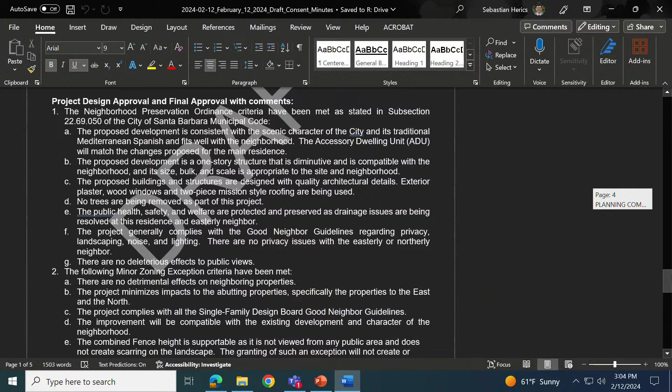Oh, the last one. Okay. Got it. Are there any items you guys didn't see? I might have skipped through the first few a little too fast.

Sure, A and B. A and B, okay. Yeah, I think those were both the final approval. If you just go to the notes - oh, that one was continued.

And so for item A, this case had a PRE case, and Board Member Kloss saw fit to continue the comments from the PRE case as the conceptual minutes for forwarding this on for further review. So you'll see these are the same exact comments that were received during the PRE hearing, with only the added note that the board reinforces that color and landscape screening will be important to see at design approval stage. Just making that a little bit more clear.

Okay, I move to approve the consent calendar minutes from February 12th, 2024. I'll second that. Do a roll call. Okay, we will take roll call.

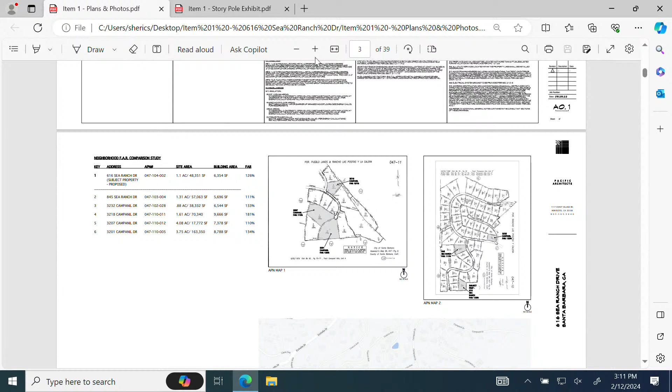Also, as we go through, we've done a floor area ratio calculation of the neighborhood. I don't know if you've had any chance to see any of this, but there are certainly projects and homes in that neighborhood which are well above the 100% FAR. You can see 181, 134, 133, and we're at 126. Again, I'm including everything as well as the ADU, and I know you won't be looking at that.

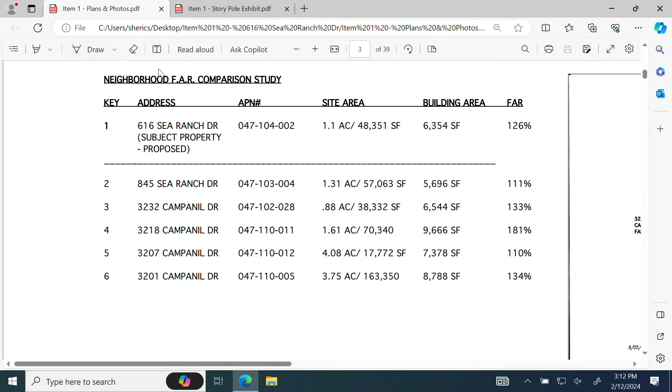Okay, to go on, what we're doing is we're coming in - right now it's kind of a flag lot. Comes off of Sea Ranch, which is here, and a long driveway, and we've worked with the fire department on developing that. Existing long driveway comes back to the home that sits in here, currently exists right there today. I've got a drawing and a document that shows where that is better than what this is showing. It's in red.

Generally, the footprint of the existing house sits right about where that one is, oriented in just about the same direction. Their garage sits over here, ours sits over here, and our ADU sits in this area. Again, it's a sloping lot, very high on this side, sloping down to a flat pad.

So this is kind of the neighborhood. You can see homes scattered around us. These houses are way, way up there, much higher than ours. These two are splitting down the middle with an easement that shares access to this property, but not to this one. They have their own access here.

We are an easement across both of those properties to get back to ours. I know we have some neighbors here today as well. This neighbor here was mentioning to me that his footprint's actually different than what's shown, I think it's a bit larger than what we're showing.

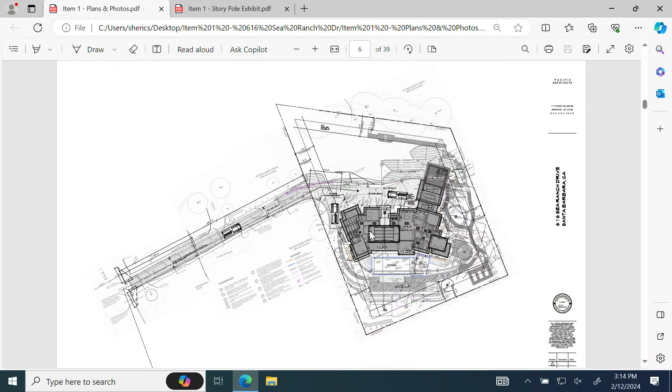Again, single story home, we kept it low. Currently the height of this is about 2.5 feet shorter than the building that's there now. So the existing house has a pitched roof, and we're doing flat roofs, and again it's about 2.5 feet shorter than what was there before.

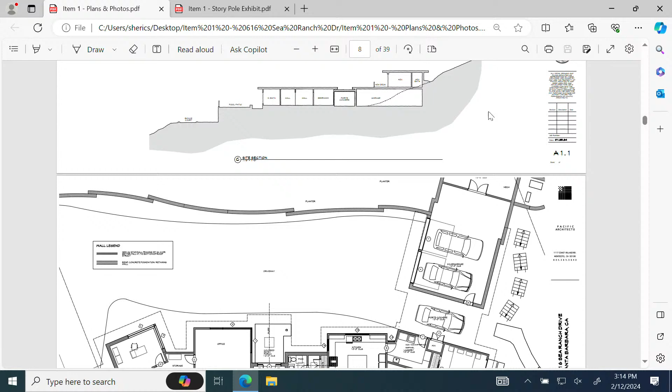Again, single story, single family home. Enter in through here. We've got a basement space under here that's really only for mechanical, that sits under this bedroom, on the high side of the property. Then the only two-story element is this ADU piece that's stacked over the top. You can kind of see it in the section here. We're nestling it into the hillside, burying a good part of that garage storage underneath.

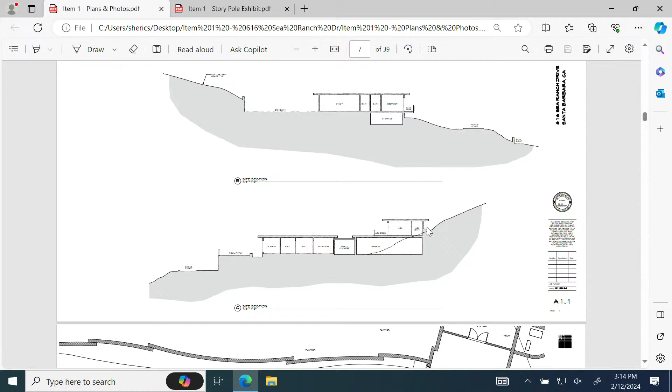Here's the little storage area underneath. So technically, I don't know if I'd say it's a two-story home, but we do have some pieces stacked over each other, those elements that are buried. Here's the garage element, again tucked into the hill. This is completely subterranean, it's 7 or 8 feet, might even be 9 feet of retaining there.

And then here's the underfloor area. Again, this is all just underfloor, raised foundation, and then excavated area here for mechanical. The rest of it's open.

I'll let Stacy get into our pool and site layout, but we've got an infinity edge pool there too. Again, ADU -- I guess you guys don't look at that, right?

Just for some clarification to the applicant and the board, the ADU is currently under the SFDB purview because it's proposing the glass railing, specifically the ADU deck. So once you get your zoning plan check corrections, you'll see that.

Okay, all right, well, there's the ADU, and again we're retaining against this side of the hill, so we're actually tucked into the hill there about 6 feet. And here's our lone glass rail right there. So if you have any issue with that, let us know.

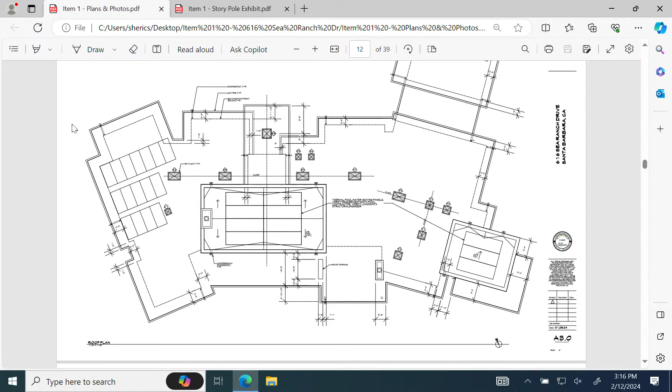Solar panels -- we've got water for heating the pool, and we've got photovoltaic on the roof for everything else. Again, single story, we're going to have a combination of plaster and stone, we're working on picking that material, very earth tones. The windows and doors will probably be aluminum, either Fleetwood or Western or a version like that, might be a fairly narrow profile.

Here's the infinity edge pool. So this view actually includes the site that you're seeing. Really there's the second story piece that you can see there, and the garage, or the ADU, sits over the garage on this side. Here's a pretty good shot of how that all lays out.

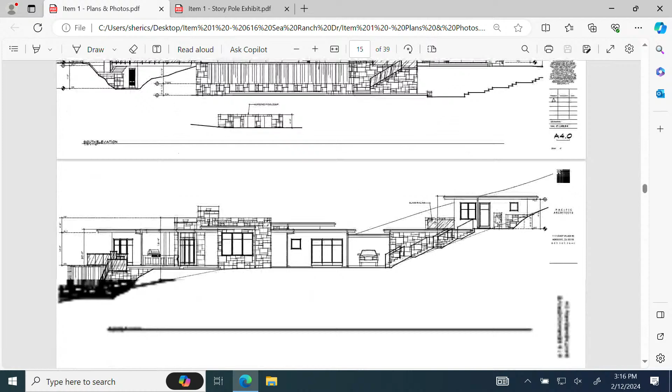There's the ADU, glass railing, garage. This is an open carport, which is actually added into the square footage too, it's open, kind of a breezeway connection. Stone, again, kind of a constructivist sort of pieces of stone and plaster. Oh, we do have some glass rail over here too, I apologize, on this side. There's the infinity edge pool.

Here is a cross section through the breezeway showing the upper floor of the ADU.

And that's our civil. Our grades, in terms of setting the finished floor, we're actually about half a foot lower than the existing house, so we're pretty much in a similar location. We're working on our stormwater drainage and our septic, we're on septic there too.

So I don't know if you've had a chance to see any of the photos, I'm happy to walk through these real quick. I won't get into too much of the weeds here, but there's a long driveway that leads out. I'm going to go to some story pole plan that I have here.

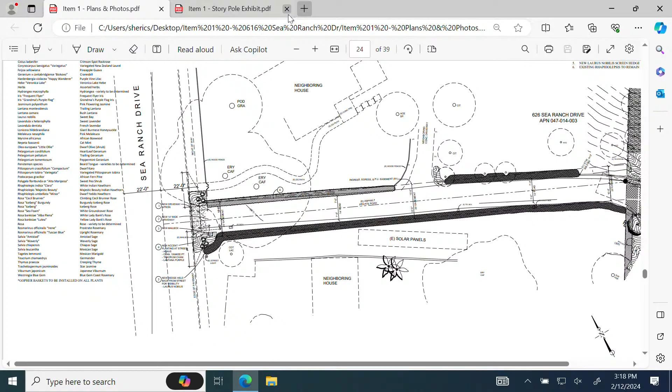We actually story-polled this structure so that everybody could see it. The HOA wanted us to do that, so we did it, and they've given us their green light. The edges of that are the roof line, not the walls.

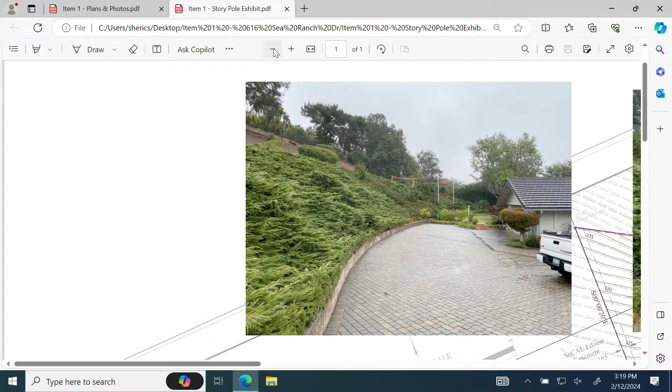This is actually story polled about 2 feet higher than what we're going to build it at, because I didn't have the civil drawings, and they came back and said it doesn't need to be that tall. So I said, okay, great, we'll knock it down. So that story pole represents a taller element.

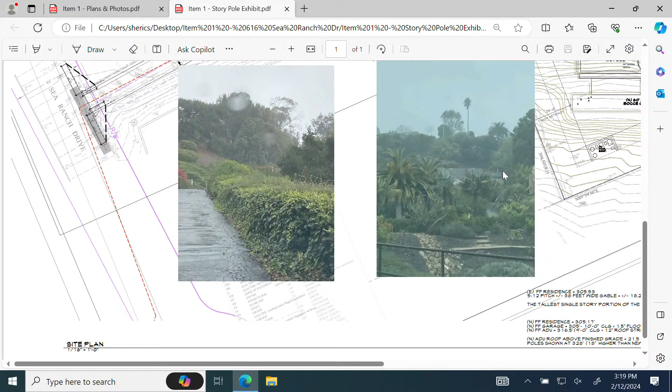I took some shots also from down the street. This is across from the neighbors here, the other neighbor here. Dan Claus's home is here, Suzanne's is over here, we're up in the middle. You can see just a little bit of the top of that second story roof line. Again, this building is about 1.5 feet taller than what we're going to be.

So you can see, and Stacy will get into the landscaping. This is a shot from about the middle of that long driveway, looking back at the roof. Again, that's the only thing you could see. You're not going to see any of this, well, landscaping. We'll see the front face of the building, of course.

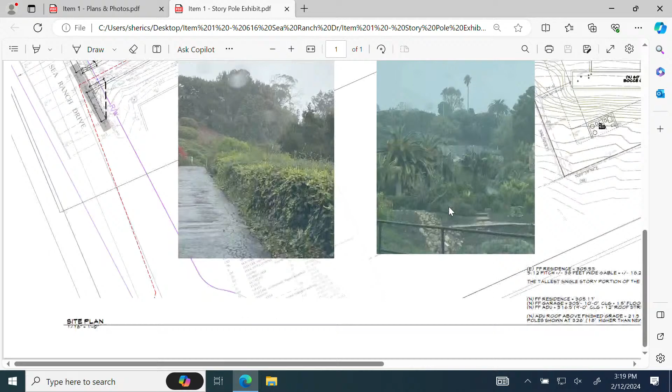This drawing also shows kind of the layout. That red shadow in there, that's the existing building. You can kind of see how we're, this portion too, just to give you a - this is all just covered lanai too, this isn't actually building. So you can see the areas that we're increasing square footage is here and a little bit here, and then of course the garage over there. So it's really not as much as it might appear.

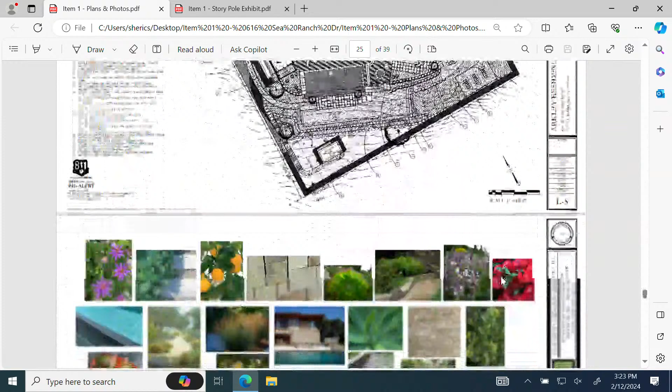There is a pathway we tucked into the hillside up here. There's a really pretty view, but currently there's just a footpath without any steps. This is kind of an example of some imagery of what we're thinking for materials, plant material, keeping with the warm tones of Santa Barbara sandstone, these types of cast-in-place concrete steps for the hillsides, using pebbles, drought-tolerant plant material, gravels, stepping stones, and dry stack stone retaining walls as garden walls to minimize any engineered walls.

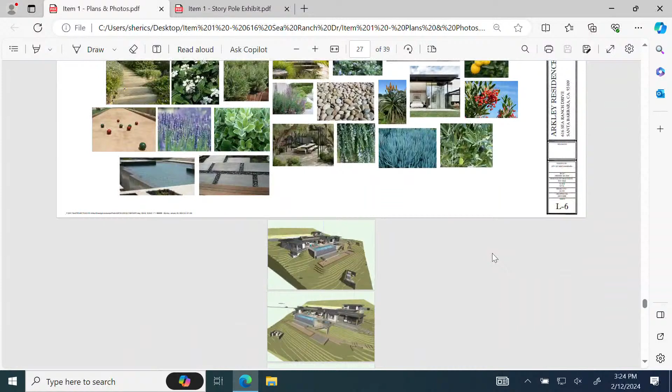Just to give you kind of the 3D, real rough and loose. Where are we here? There we go, okay. Anyway, just to give you the idea of the massing of that and the slope - it doesn't have any trees on it. No trees, this is denuded of any planting, of course, and it will not be like that. Again, kind of earth tones, that kind of thing, tucked into the hill up here.

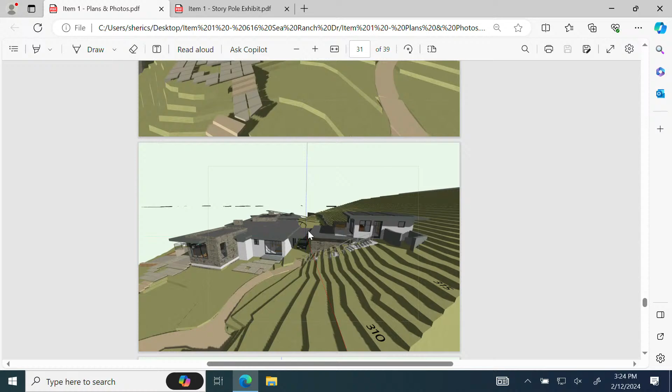Infinity edge pool, with the side sloped again. It's a two-story home. A lot of large trees at the back, that back slope too. This is all very well screened. That whole side as well on the other end is also screened.

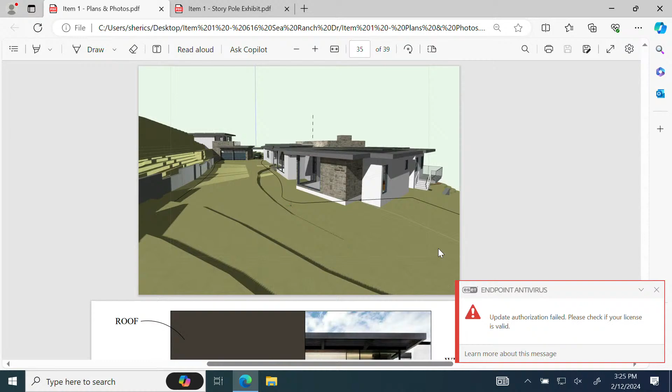This is the front. You can see 6 feet of retaining on that upper floor of the ADU. There it is, tucked into the hill too. Again, all planted along that western edge as well.

And there's just kind of your sample material colors and finishes kind of happening. It's a work in progress materials, exterior materials board.

And there's the existing house. Again, we're about 2.5 feet below that. I think I scaled it at about 17 and 3/4, almost 18 feet, and we're at 15.3. So we're quite a bit less.

These are the existing trees that are happening on the site. And the pine too, that stays as well, right? Yeah. And here is, move it over. That's kind of the aerial there.

Where are we? There we go. Gray house, yeah, there it is. So you can see pretty thick vegetation here. And we're not protruding anything beyond that line, so the idea is to keep that lush and thick and keep the privacy between the neighbor here. These folks are much higher, they don't see over. And this is also quite lush and thick. And I believe those folks have been talked to, and then the neighbor down here as well.

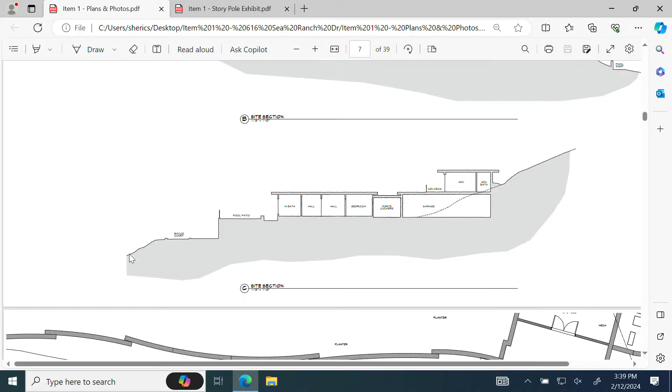But it does continue downward. Is the roof deck only at the ADU in the back portion? Yeah, that's the only roof deck, no other roof deck.

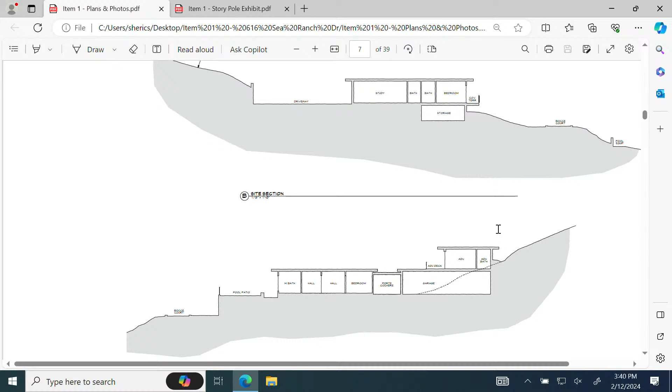Is the second story of the residence only defined as such because of the storage area on that lower southwest corner? Yes, it's this storage area here, that's the only second story, including this ADU over the garage, tucked into the hills. The reason you have to technically call it a second story is because the level of exposed basement doesn't technically qualify, and I think we're 3 sides covered, although do we need to be 4 to be considered a full basement?

That's something we can explore. I just wondered if that was the only area the speaker was talking about regarding the second story.

And then, was it 122 or 126% FAR? Because you have conflicting documents, one said 126 and one said 122. Oh, does it? Well, we'll go with the higher one, but I can clarify that. And without the ADU, what would the FAR be?

Without the ADU, oh, I can't do math that quick. I'll give you a little bit of time to come back, because I think I'm probably not the only one that's going to have that question. What's your ADU square footage? Yeah, the ADU square footage is, well, let's go to the front page, here we go.

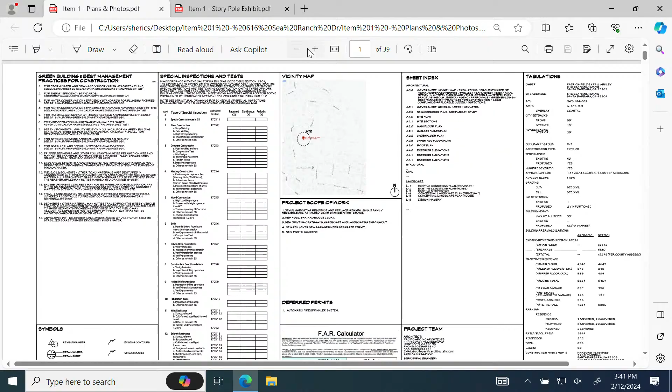But I also wanted to know if it also included the carport. Yes, it does include that carport. The total 6350 includes the breezeway, which is a carport, and the garage, and the storage, all of it. It's all of that, which is maybe not really the right way to look at it.

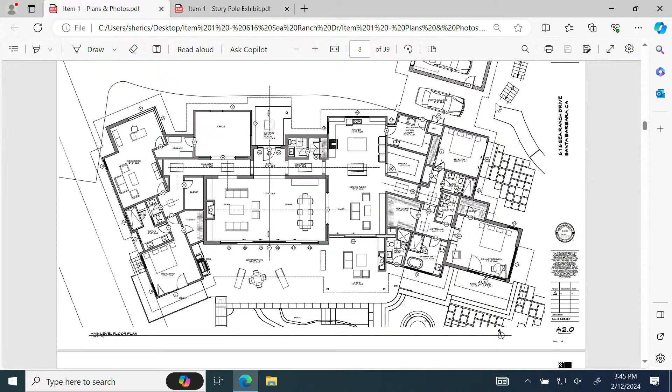Okay, so it'll be two plans. This is the storage that we need underneath, and then the other is up in the ADU on that deck right here, this bit right here. We're open to suggestions, if the glass isn't appropriate, we can change.

No, I just wanted, I was more curious on the south side. Thank you.

Any questions? Yes, I'm feeling the rush to keep it at the same pace. But back on the FAR, because that's one of our biggest challenges, is to find neighborhood compatibility. And honestly, the 126 is probably the highest that I've seen.

So I think that in further submittals we need more clarification on those square footages. Typically, we look at the 10 closest homes or the 20 closest homes for neighborhood compatibility. So I would like to see surrounding your property versus in the area. To me, that creates the neighborhood compatibility, because what you're saying is actually, it's not double the square footage.

So getting clarity on what the square footage is, I think Dawn covered it, so I'm getting closer to being more comfortable with that. But I'm still questioning. As an applicant, when you ask for more, you need to provide justification for it to be easier to say, yes, it's compatible. So I guess I don't have any questions on that further than Dawn's.

Do you want me to do that now? Sure. Oh, okay, all right, sorry. So, a lot of this will be certainly handled in terms of privacy, is the existing screening, is landscaping. So I'll let Stacy talk to that quite a bit, but I'm happy to walk you through the elevations as well. Yes, thanks, I can get to them, wherever they are here.

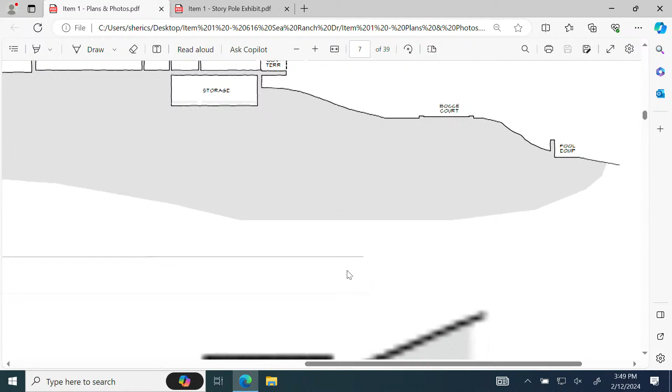And most of the south facing, we have eyebrows to help cut down on the sun angles too. So that's some of the options that we've done there. We do have tall 8 and 10 foot windows and doors, which is fairly typical of this type of architecture. This is the east side. Again, I don't think anybody seems to have any concern with that.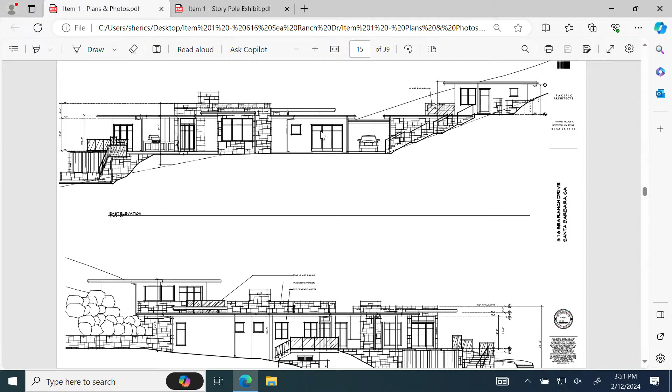Well, that's the one on 606, correct? Hand to the left, that's the west side. Oh, that's the west, yeah, okay, so that, I think, west and south seem to be the most concerning of everybody. This is the east side. There's a porte cochere, glass, again, overhangs on all conditions. This is the west side. Here, we have fewer windows on this side, and we've kind of positioned them lower or further away.

These are high windows, so you're not really going to see much with landscaping. The existing hedge is probably up to the top of that window line. There's an existing oak tree where you have that 22-foot elevation, right along the property line. And then there's a xylosma hedge, 16 to 20 feet tall, that runs along that property line and ends right in here. We're happy to add that to the next elevation if you want to see exactly what we're getting at.

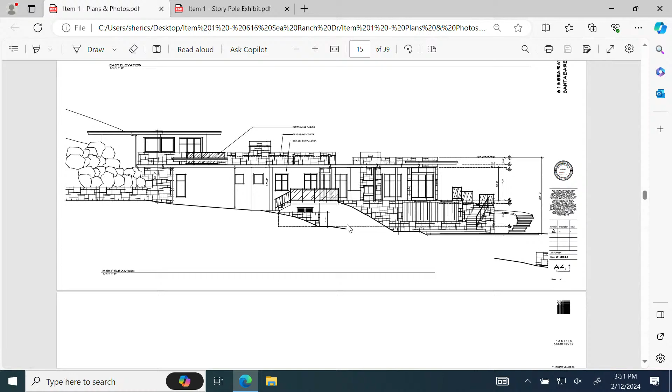This is facing south again, but you're having to look over the roof of the single-story house in front to get that view. Again, long overhangs wherever we can get them to help reduce the glare. We'll certainly be considerate of lighting for the site on the buildings, to be night sky compliant.

Did I address all of it? Yeah, I think most of the concern, because the south is set back and the west is so far away, was the east neighbor and the conversation around her pool and her yard on that side of the house.

West neighbor? Is that west? Is North up? North is up, west is there, south, east - east is here, and west is there.

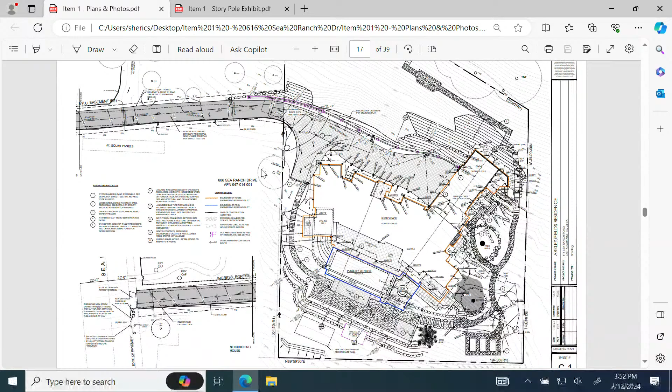You can see the oak tree right there. There's hedges and trees that are, whatever, 8 feet more. You can see the existing oak trees there with the dashed circle, and then that hatched area is an existing hedge that goes all the way down. The solid line is...

That's new screening along that property line. And then you see the tree in the center of that south property line - that's an additional tree added for that corridor that looks down to Dan Claus's property, to kind of block that view. There's also an existing pine. We didn't have time to color this; we had a short turnaround on a few things, so maybe it'll be more colored for next time.

Board Member Anderson? I do, yeah. The true stone and the glass rail - did you consider another product besides the glass? And the true stone, is that a natural stone, or you don't know yet? It's natural, it'll be a natural stone veneer, some sort, yeah.

And the glass - we left our options open. We could do cable rail, could be stainless rod, could be just about anything. They favored the glass, so we thought we'd start with that.

Okay, all right, that's it for my questions. If you could walk us through both of the equipment yards that you have, and what's provided screening-wise. Let's zoom into there. So where the pool equipment is - you've got equipment on the side yard and then one in the back as well. Both pool equipment areas are enclosed on all sides with a masonry wall.

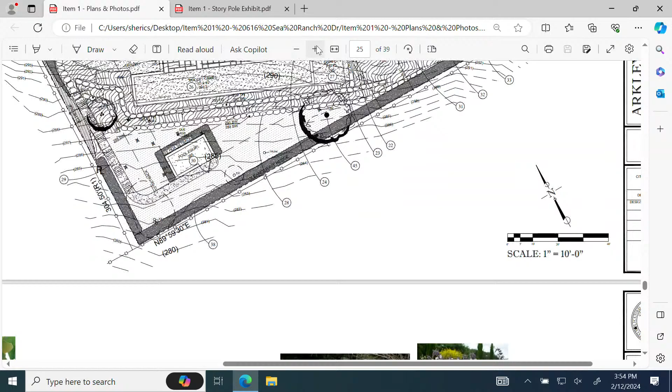It's also sunk into the hillside, so sound mitigation shouldn't be an issue. We're out of the city setback. The HOA setback is slightly different - we're only into that one on the south side.

What was the other equipment area? That's up on the west side. Right there, there's just a little bit that's outside, uncovered. So this is an area where we had talked about doing just the condenser units out here.

Again, we'll be cognizant of their sound levels and make sure they meet all the minimum dB ratings for neighbors' property. The majority of the equipment's going to be underneath the house, though. This also has a masonry wall around it, sunk into the ground. It's sunk into the hillside, so you won't see it, and certainly the deadening of earth and an 8-inch thick, at least, masonry will help do that too.

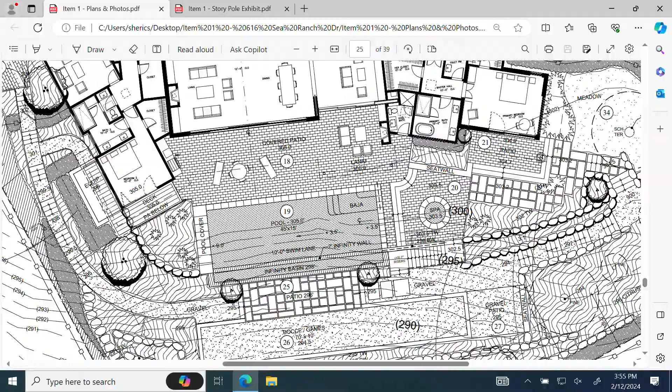Okay, all right, I think we're good to move to comments. We'll start back over here.

I think this project is a really good example of an applicant being very sensitive to the site, with the proposal for essentially a one-story house on a steep slope with manageable plate heights and nice materiality. I think it's also a good example of how easy it is to exceed the FAR when you add an ADU, a covered breezeway, a two-car garage, and a 300-some odd square foot storage room that you can't see from anywhere.

It would be good, just for peace of mind, to have that analysis so we're more comfortable with it. I'm surprised it came out to be 126, honestly.

I think good neighbor policy for privacy should be achieved by landscaping, not necessarily by creating high windows on houses. So I think this is also a really good example of efforts being made to provide screening, which I think the applicant wants just as much as the neighbors do.

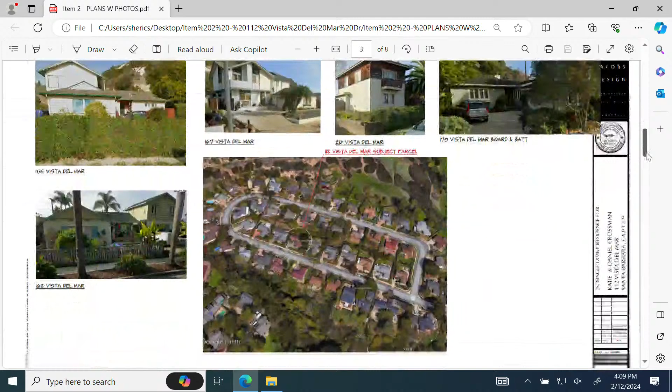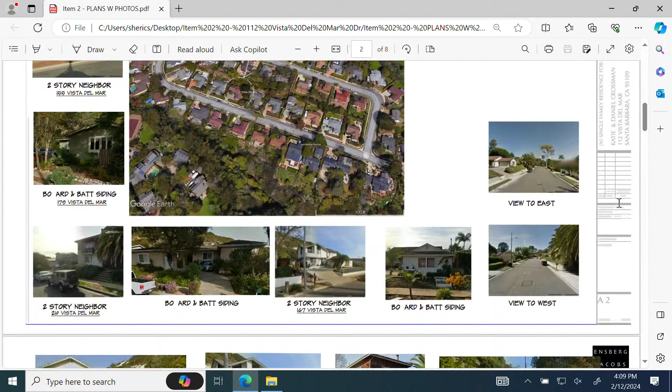This shows a little bit better some of these houses. I'm sure you may be familiar with this neighborhood, having seen other projects come through, but this is the subject property right here. This is coming up to the east, going down the hill, and then this is going up the hill. We took pictures of all the two-story homes that are just kind of sprinkled around.

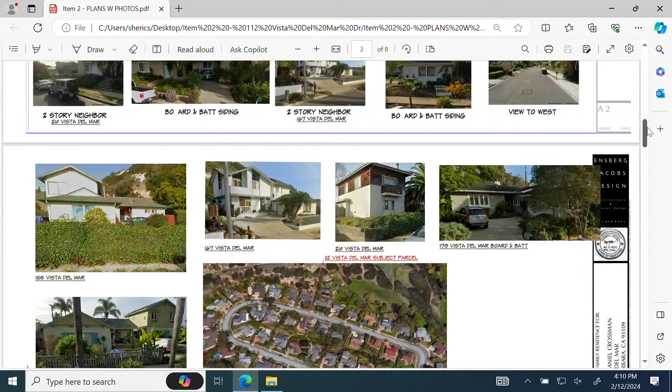Obviously it's in the coastal zone and the coastal high fire zone, but we don't have any issues with being in coastal, so we got a pass on that. But it is high fire, which is kind of a surprise when you get your site information - high fire, coastal high fire. It's our first experience with that, but you can see why there's a chaparral zone, and that makes total sense.

If we start with the existing house, the size is 1625 square feet. It's a 4-bedroom, 2-bath house with a 400 square foot attached garage. The lot, just like every other lot on the cul-de-sac or development, is an L-shaped lot - the development is L-shaped on the lot.

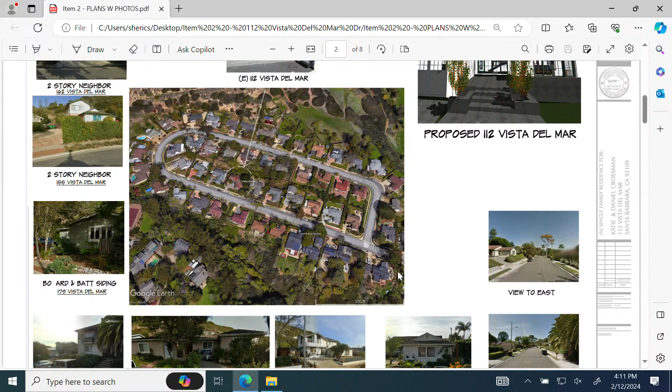There's usually a right turn into the garage, which is downhill. So the developer was sensitive to the topography, but he didn't have anything other than one particular step, which was take a left.

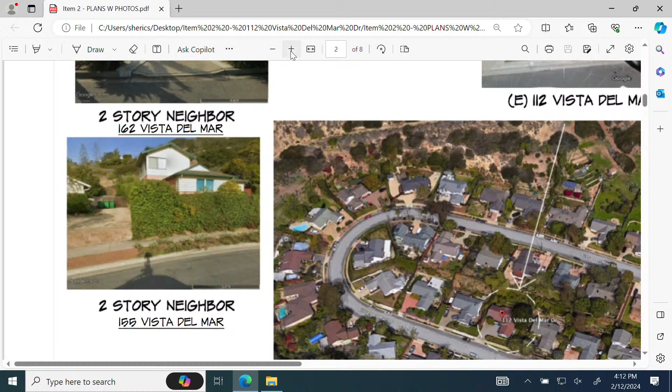I wanted to zoom in a little bit on that. Here you can see how it's typical with the garage, so the cars cross in front of the front entrance to the house. I'm sure you're very familiar with this pattern - one of the reasons it occurs is that if you turn your garage 90 degrees, you get an additional 5 feet, so they were happy to make use of that.

The proposed development, to repeat, is 2,466 square feet. It's 4 bedrooms, 3.5 baths, and a 421-foot attached garage. The lot is 80 by 110, so 8,800 square feet. Our FAR is 85.

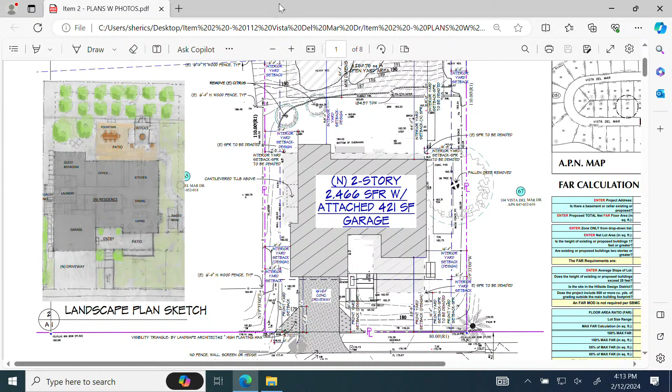We had a lot of iterations to get to 85, but I know in terms of the impact of the development, having it at that number really helps it fit into the overall setting, because these are all modest homes, and it also makes the two-story comfortable rather than having it stick out. The existing house is also on the setback on the west and the south.

That's one of the things we'll see here. I guess we can go to the plan. This shows it moved - it's underneath, lightly dashed there. So it is on the setback on the west and south.

Why don't we keep going to the plan just to walk around. So you can see in this grade version where it is closer, and it feels very tight when you're there. That's why we wanted to move it over a little bit, because we had room on the right-hand side, and we're trying to also get it away from the neighbor here on the west side.

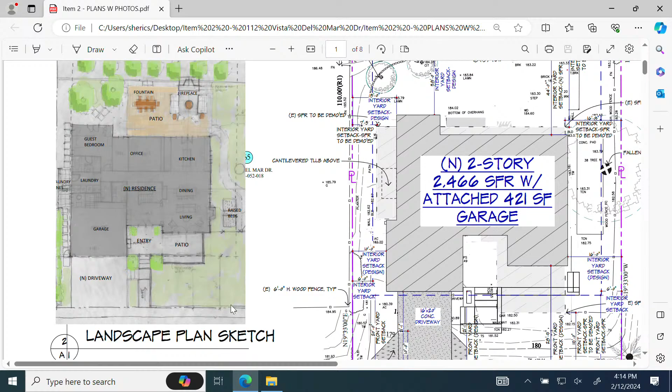To add to that, rather than having one side be simply utilitarian, we wanted the landscaped feeling rather than an alleyway feeling on that side. So we had an overhanging tub that we did not want to have an encroachment. That was another factor in keeping the development a little bit further away from the property line than you might imagine necessary.

Okay, yeah, so quickly, you want to go back to the floor plan? Yes, so quickly on the floor plan.

This is the proposed floor plan, and you can see we've moved the garage over to here. This piece and this piece are the two-story elements, and this is one story, shorter than the other two, with major living spaces, stair, family room, guest room, garage, and miscellaneous laundry, et cetera. Going up to the second floor, here's the two children's rooms with a Jack and Jill bathroom, and the primary bedroom with the bathroom and tub Tom talked about, with a deck here.

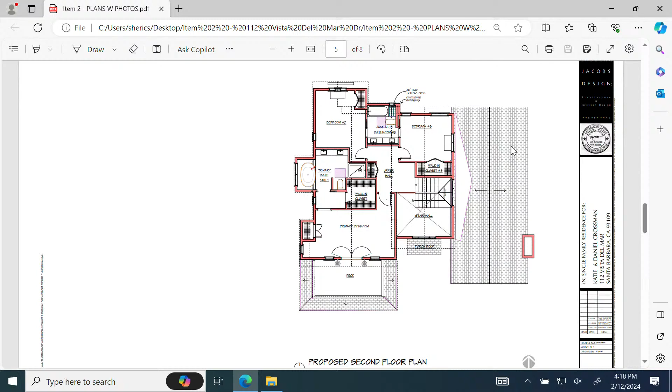The house adjacent to the west, the area in that corner is a utility area, and it's 17 feet from the fence line. So that house jogs in. We're trying to get them as far apart as possible, also knowing that's where they have their trash cans and utility area, since we know these decks are always an issue.

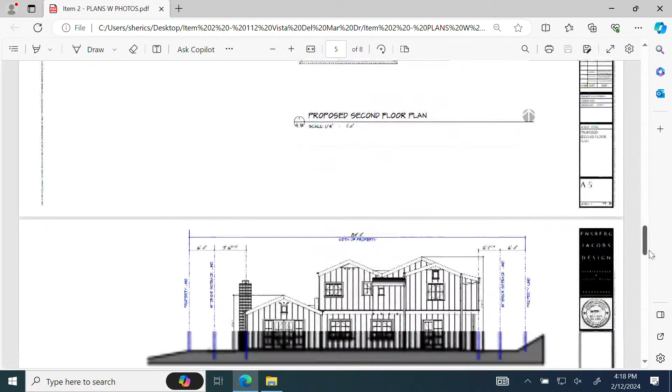So, I think that's enough on that. Then to the elevations. I'll go to the south. Here's the front elevation, and there you can see that deck. From this point over to the fence line is that 10 feet we were just talking about. So here you can see how it looks.

It's a farmhouse style, board and batten. We're thinking white with a dark green, not black—we thought we'd veer off the black a little bit. We're using Andersen windows, and probably a slate gray roof, something like that. So you can see the style of it; it was trying to be in keeping with the general style of the neighborhood.

So that's the front. You can see this lower roof is 12 foot 10 right here, and then these taller ones are the same, at 21.8.

Okay, I think we're about done. So here's the north elevation, and here is the east, where the fireplace is, and then the west.

The other thing we did, Katie and Dan reached out to the neighbors. We did get the letter this morning from the neighbor above, and reached out to them immediately to talk, and they were very helpful—we had a really good discussion. We alleviated their issues with the night sky, which is obviously something we all care about, so we really appreciated that comment, and I feel confident we'll be able to work it out.

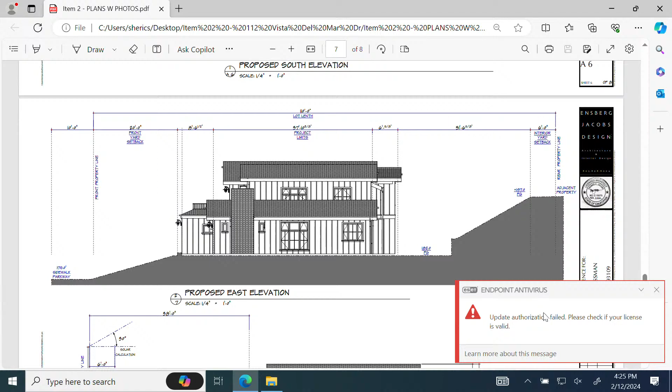Thanks, no more questions. Okay, perfect, no questions, you answered all of mine, yeah. Okay, perfect, any questions, Anderson? Anderson, yeah, sorry.

Board member, regarding the 20 closest homes again, we're at 85%. Sounds like you made reductions. I don't feel like it's potentially an issue, but it certainly helps us justify the FAR if we have the 20 closest homes. I know you've shown some 2-stories in the area, but typically what I saw was just like one part, or a 2-story over the garage—it wasn't a full or a 2/3, 3/4, 2-story. So did you do any of those FAR additional studies in the guidelines for your 85%?

I think that the 85% was the limit, which set the necessity of doing it, so we were just under the limit. And just for clarification, the applicant is correct in this case—if it's over 85%, that's when those requirements kick in.

Thanks, and we really felt it was a good exercise, because we were trying to get it down and we didn't want it to be too big. We wanted to bring it down, so when we went through that exercise and shrunk it, it really made it better. So we're happy with that.

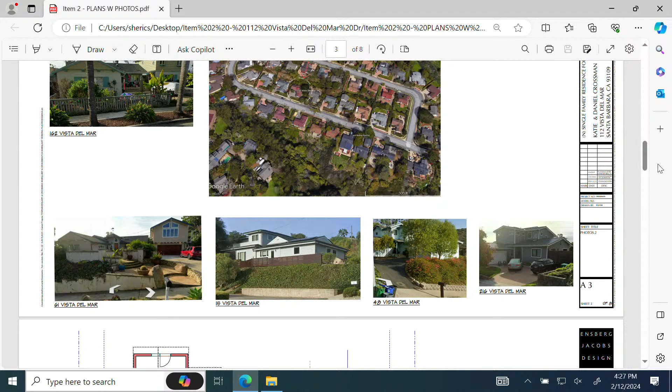What's actually quite similar between our proposal and the ones we're talking about is that we do have an area that's single-story, and the rest of the house is popped up. So we followed that pattern, which can be graceful or not, but there are quite a few houses with that model.

And to add to that, thank you for the question. We purposefully, sensitive to this, made this side the lower one because of the neighbors up behind, and the view is that way. So we wanted this side to be low, and the other side was okay to be higher for that specific purpose. Okay, and you set it back on the west side an additional amount. Got that.

Okay, then the garage and the whole pattern of development with the L shape. I'm sure you looked at other options, garage doors facing the street, which isn't necessarily ideal. I know it's more functional. So maybe you could talk about that, as well as the roof coming up partially to hide the deck rail, and did you take it all the way up or try one versus the other?

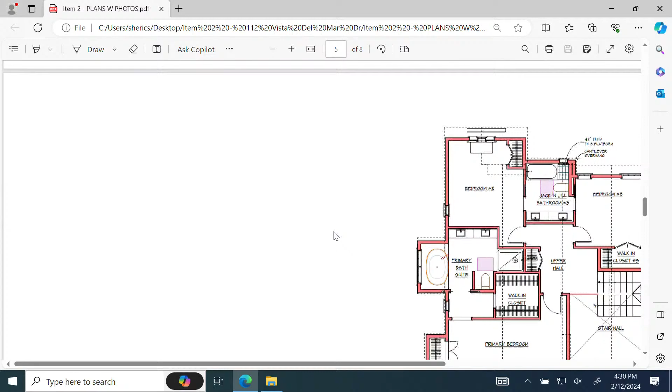And like Tom says, I think this is pretty classic looking, at least we feel. Let me go back down to that. And you get this nice transparency. The windows go all the way through.

So our idea was we want to be able to come through and actually be able to see all the way to the back in both of these situations. So it's very light and transparent and very open to the public and to the street.

The other thing on the deck, we did look at the deck being the full thing, and we thought no, it's too much. That's why we shrunk it down like that, because we just wanted a little place you could come out and sit and look, without it being this gigantic deck. So that's why we did it like that. It could probably shrink down a little more if needed, but we're not married to that. It could be smaller. It just needs to be a nice little place you could get out.

And again, this point right here is 10 feet to the next door. And then you can see the neighbors going up. Is it 10 or 13? I think it was 13. Did I say 13? Oh, it's 10 plus the 3. Because the roof part, this part is 3. This is 10, and then this is the 3.

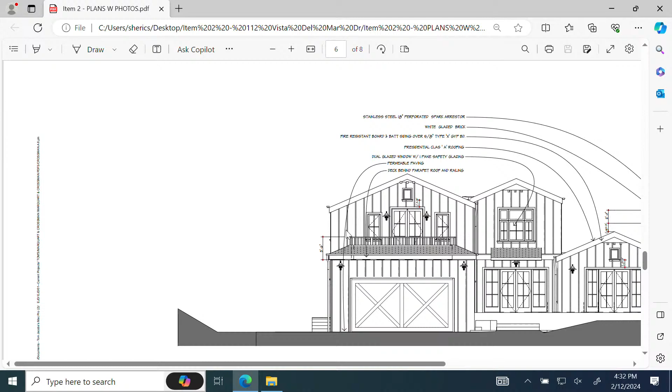Thank you. And that second floor is set back beyond the garage, right? Yeah, so it steps back with the deck and the second floor popping up on the front. Exactly, that was one of our main concerns, was not to have any long, straight facades.

And so every time we broke it up, it made it smaller. So that was anything, the tub overhung, there's a tub in the back that did the same thing. So the house had, with its FAR, we had nothing left to spare. So it was just, we were both working together to create interest, but not expand.

Yeah, here you can see that thing, right here. This is the laundry room below. This is mechanical. And then this is a little Dutch door going into that garage. And then there's that deck.

Thank you. Any other questions? No? Okay, thank you.

On the front elevation, I have two questions. One, the rendering showed garage doors with windows in them, and your elevation shows solid. Which one are you guys leaning towards? We're doing this one, the solid. We did look at a variety of different ones, but this is where we landed.

And then that site wall there, I know you guys haven't fully developed your landscaping, but what are you guys thinking? Do you mean here? Yes.

I think we were looking at a formed concrete with a boarding. That's what I'd like to see, just a formed concrete. But it'd be good to hear from the landscape architect to see what they think. It seemed like something very, not overly fussy.

And then, of course, there'll be planting. This drops down to the sidewalk, so there'll be plantings in front, some landscaping there, so you probably won't see much of it.

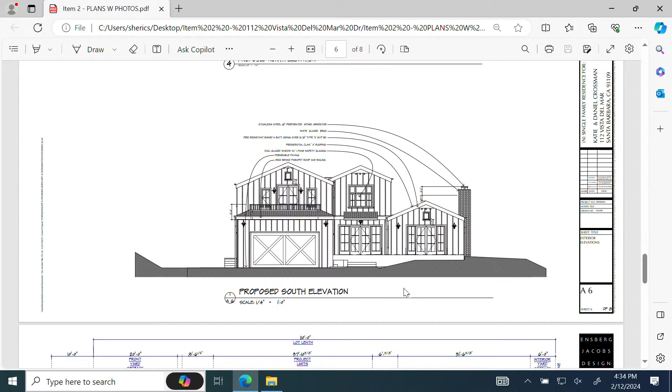And then this right here, sorry about the little drafting glitch here. The steps, imagine a lineup, you go straight up there. But right now it looks like the site wall is also sort of the railing there.

It's like a seat wall. We don't have 30 inches, we have less than 30 inches, so we can do what we want. Nice, so it's here.

It's more of a punctuation rather than protection, a little place you can come out, a seat wall around.

And then this is supposed to be steps going down to this back area back here. Perfect, okay, so lots to work out with the landscape, but you get the general idea.

All right, I think those are all my questions. If we want to start with comments over here. Yeah, I appreciate you sticking with the 85%, so you don't have to do the 20 closest homes, and that's always a drag. And then the only thing that kind of hit me right away was the garage plate height.

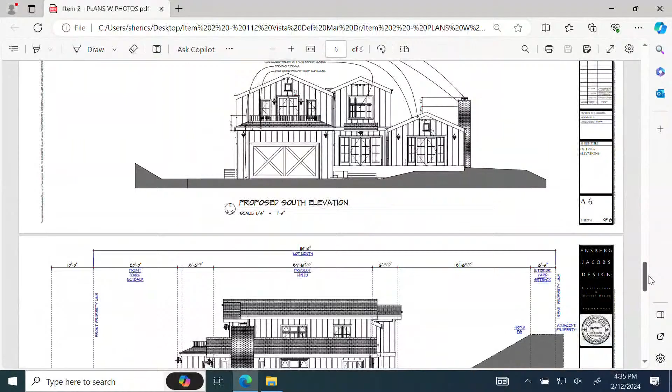If you go back to that, it seems like the garage door relative to the height of the garage, from the front and also viewed from the west, now go to the west elevation. You can really see that issue. That door just seems so low, and then the window is so high, it seems just a little bit off.

The proportions of the house are so nice, and I wish the garage plate were lower. That's my comment. If there was an eyebrow above there or something like that, it might make the difference. But because you have that massing above there, it just kind of exacerbates that plate height a little bit.

You were talking about how you wanted the house to be articulated with these differing undulations between the upper and lower level, but on the back side and on the west side, I feel like it's more of a two-story stacked look, which is fine. You've got that belly band running through there, and you can't really see it from anywhere.

You probably did that so that you could have stacked walls, and so I appreciate the belly band going through there, especially because it's the board and batten material. And the front's fine, and the two-story is not the entire thing, so it's just...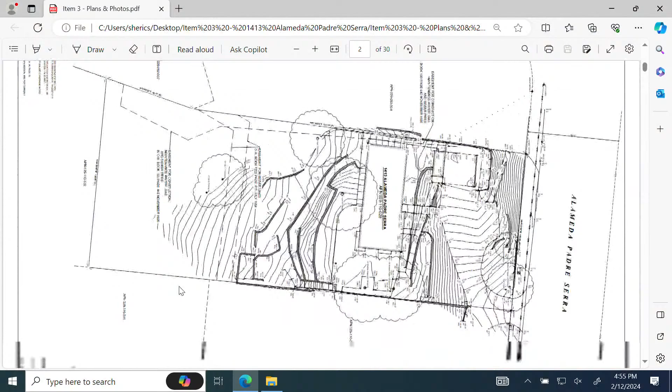Yeah, and again, we're in the process of starting the civil and landscape, but you can see that it is currently non-conforming in regard to the setbacks. We're not making it any more non-conforming.

You have no idea. It's like, oh, this is currently not, well, you're making it more okay.

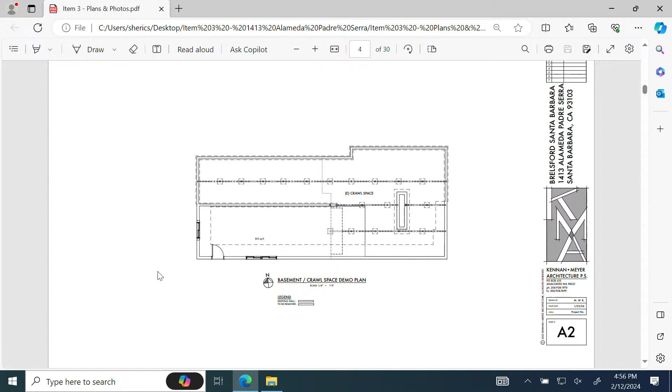So basically, right now, it's a one-story home with a crawl space. We are adding an interior stair, which you don't care about, but we are taking over the front part of that basement. And again, I don't know if that is important to you. There will be quite a bit of engineering in order to make that work.

We are moving some walls, which, again, I don't believe you care about.

We are adding 2 little Juliet balconies on the south side, right off these 2 bedroom suites. They will be very minor, basically just so that you can have a French door there because the view is so stunning. We don't picture anyone ever sitting on these balconies, but it's just to be able to have the floor-to-ceiling glass.

We're also redoing, and you'll see in the elevations, the sliders along the front, adding some access to outdoor spaces along the side.

The entry, we're going to be working with the landscape architect. It's rather mean right now. Because it's below the street, you come up and you just keep dropping down these steps, and we're going to try and have the entry with landscaping become a little bit more friendly.

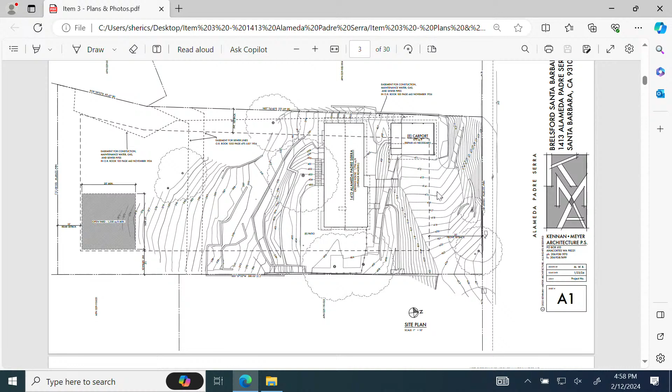So everything's below the street. The curb cut is right here, all that will stay the same. The paving will be replaced, but not enlarged at all. And so you come down this lovely cascading driveway, which you can imagine in the rain, and then the steps are right here. Again, I don't know what she's planning yet, but hopefully we'll make this a little more meandering on the way down. You can see from the number of contour lines that the ridge of both the carport and the home are below the street level.

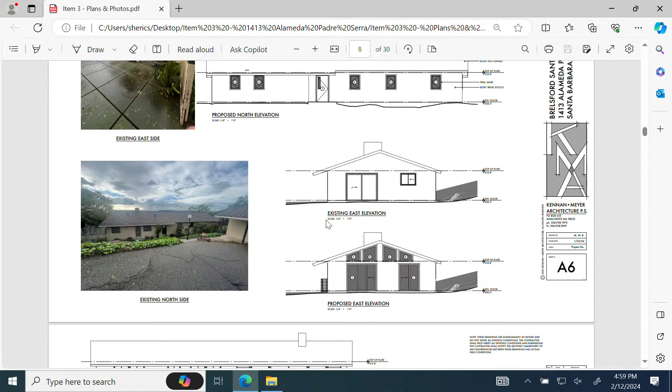The east elevation, we're opening up a little bit more to get some connection to the outdoor space, which is over here. And the landscape architect will be working on that as well.

The south elevation has this amazing, amazing view. Currently the basement is just the washer dryer, only accessed from the exterior. We're adding an interior stair and just opening everything up. It's still 1950s single-pane jalousie windows right here, and we're going to be doing French doors with the little Juliet balconies, and then a nice sliding door to connect the basement family room to the porch or to the yard.

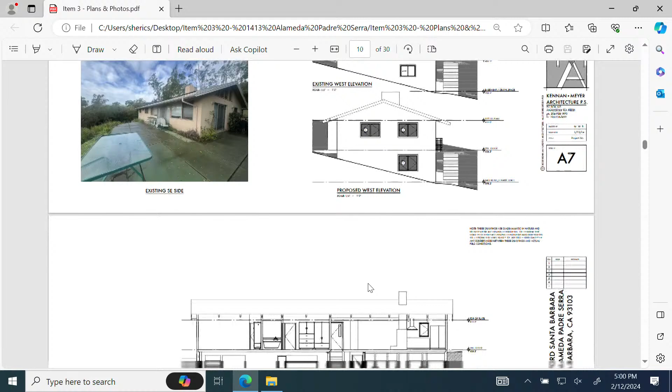That is probably all that. I would just add, we were proposing solar panels on the roof. Yes, sorry, we are. But it's a south-facing roof, so they'll be just in the plane of the roof.

Thank you. Oh, sorry, if you wouldn't mind going to the end of your site photos that you have at the bottom. I think they start on page 19, walking us through those.

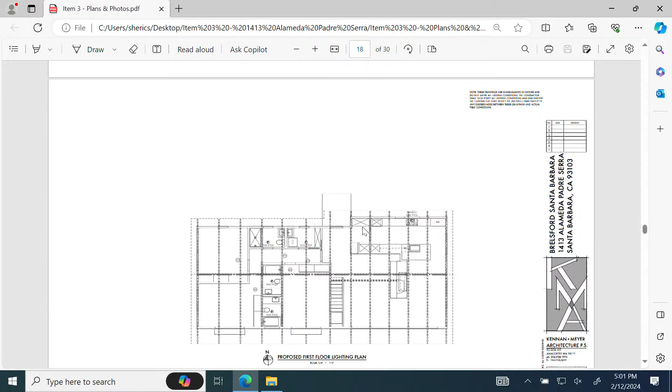Windows will be replaced with a double pane clad aluminum Marvin window. Stucco is going to stay the same, it's a really lovely, high-quality sand finish. We'll probably go a little bit less pink and a little more cream, but we're still going to stay very much within this vocabulary in color. We will probably go to a dark fascia.

Yeah, this is a better drawing. We are getting rid of this door, it's very confusing right now. This is the front entry, this is the door into the kitchen. You can kind of guess that the front entry or the kitchen door was the only one that was ever used, but we're eliminating that.

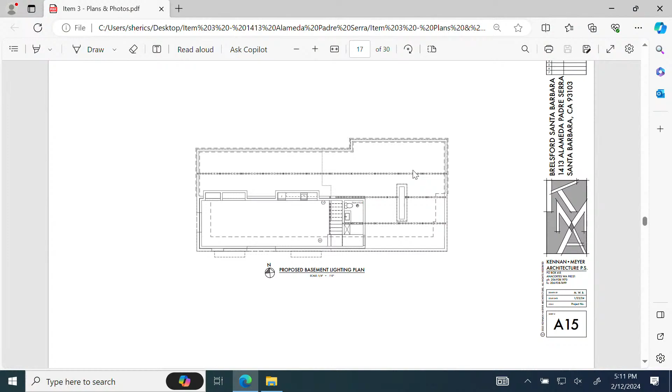I did notice that your new door on the lower level appears to be about a foot away. The header appears to be about a foot difference compared to the floor level of the upper level. If you want to pull up that Juliet, page 9 might help staff, but it appeared that the header looked a little tall. It might just be very, very thin framing.

Oh wow, it's like 2 by 6s. Yeah, just on the south elevation, page 9, right there in the center. It looks like your header is basically in the rim joist. There's no header there, like there's room for a header, or it's probably the rim joist. The rim joist and the header are probably the same.

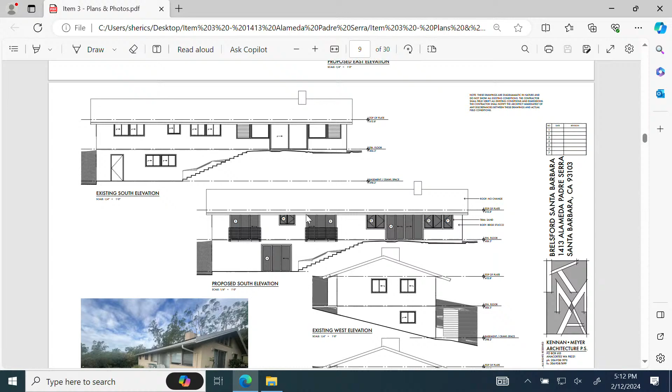A rim joist can't be a header, so I guess you could just take the rim joist out and have the joist go into the header, and it'll be a flush frame situation. That's the one thing I noticed, so I think it probably is a flush frame situation. This is also why I want to get the engineer down here and started on the whole thing.

Did you have any comments? No? Does anyone want to make a motion? All right, I move to continue this project.

I guess, is it a continue with pre-app, or do we just provide comments? Yeah, you would just provide comments. Okay, and then in the motion, you can say recommendation that, yeah.

So the board generally agrees that the project can go to the consent calendar or staff hearing officer for approval. I believe that, oh go ahead and go through your motion and we can make the corrections after. I don't want to pause you right in the middle. Okay, or staff for approval if appropriate.

The windows are generally, I don't know, the board is generally in support of the exterior windows shown in elevation and the Juliet balconies. There's no privacy concern given the distance and grade and existing plantings, despite the increase in square footage of windows and glazing. The material palette is stated to closely match existing, which the board is in agreement and support of.